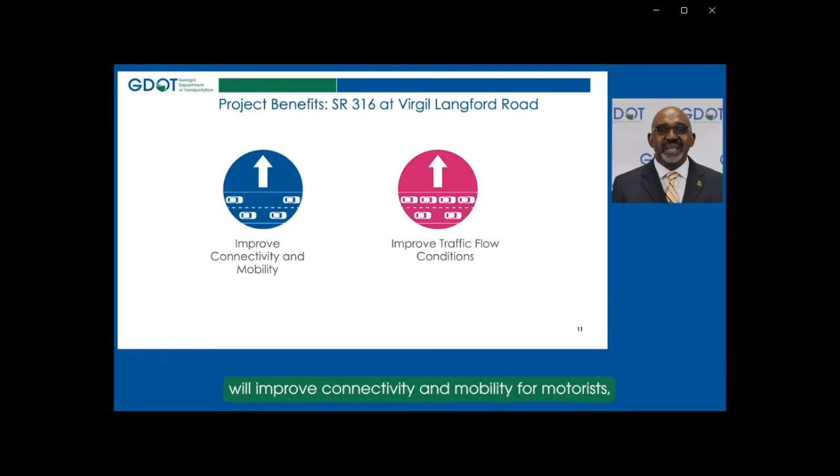Let's take a moment to discuss the benefits of these projects. First, we will look at the Virgil Langford Road grade separation. We anticipate moving forward with this project will improve connectivity and mobility for motorists, and that this project will result in improved traffic conditions.

Continuing with the discussion of project benefits, the State Route 316 at the Oconee Connector project will improve mobility, reduce the potential severity and frequency of crashes, and improve traffic flow, as previously mentioned. The benefits of both projects are in line with the goals to improve State Route 316 as a key transportation facility for this region.

This is the proposed schedule for both projects. We started the environmental process in 2021, and it will continue until 2023. We are currently conducting a virtual public information open house, which includes the virtual event you are participating in today. In 2023, we will select a design build team, and we anticipate construction starting in 2024. We will continue to provide regular updates and communication to stakeholders and the public throughout the duration of the project.

It is important to note that these two projects will be packaged together as a bundle with State Route 316 at Jimmy Daniel Road for procurement, final design, and construction. Project schedule and dates are subject to change.

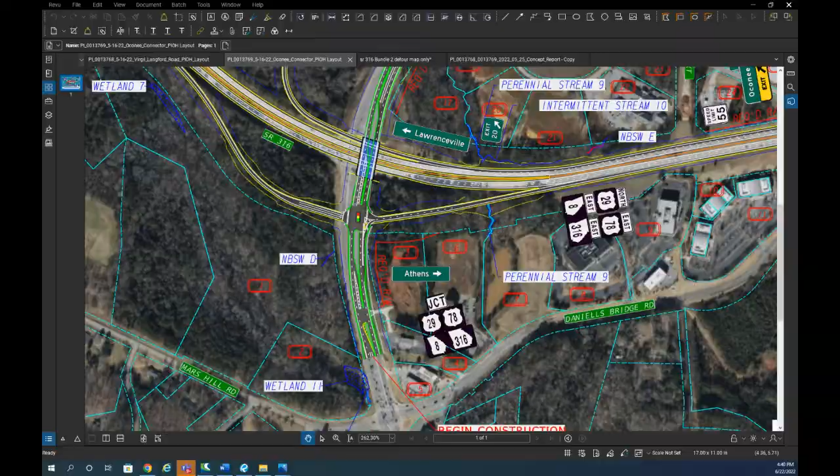And Chris, we may want to leave that up for this next question from Jennifer. Okay. Jennifer's follow-up question is, what was the idea behind making the Virgil Langford overpass separate from the entrance and exit ramps for Oconee Connector? These two roads and intersections appear to overlap.

All right, let's see. Well, I think I understand. So the reason Virgil Langford is separated from 316 and from the ramps of the Oconee Connector is that 316 is going to be a high-speed facility with limited access points of entrance and exit. The traffic volumes on Virgil Langford don't suggest that that's needed. We don't typically add additional access to an interchange ramp, if you will.

In other words, we wouldn't, and I'll switch over to the other layout. So Virgil Langford crosses here. Right there, those are high-speed locations where vehicles are picking up speed to enter or dropping their speed to slow down. Intersections for Virgil Langford there would just not be safe, and that's just not something that we do. The best idea here is to separate Virgil Langford from 316 and create a new connection going from one side of Virgil Langford to the other side over 316. I hope this answers your question.

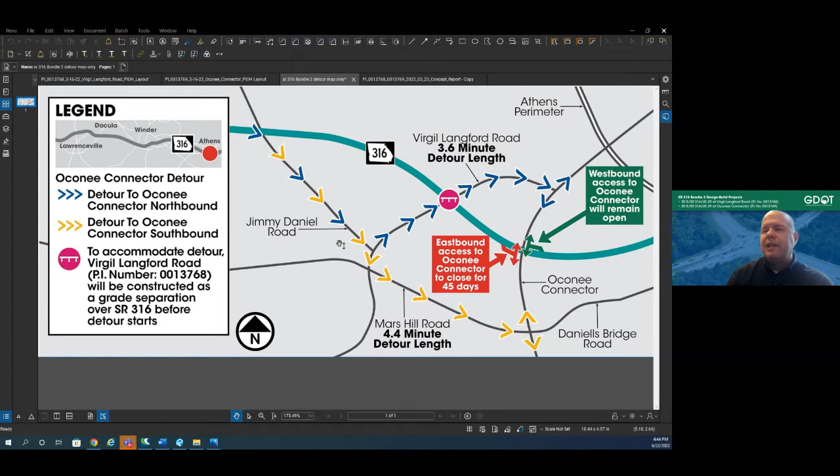One thing to point out is that this absolutely requires the Virgil Langford grade separation project to be complete to the point where they can open up traffic onto Virgil Langford. It's designed to split traffic up northbound and southbound, but it's a 45-day limit he'll have to work within. It's an option he'll have, though we don't know for sure if he's going to implement it. It is his choice. I hope this answers your question.

Thanks again for that clarification, Chris, related to the detour. Looks like we have an additional question from Jennifer and Achor. This seems to be a traffic and signal timing question that Jennifer's curious about. Give me one second. Will the new entrance/exit ramp intersections be synced with existing county-run intersection lights at Virgil Langford and Mars Hill?

Thank you, Carl, for that traffic question. We have a subject matter expert on traffic on our panel with us today. His name is Paul. Paul, can you help us with this question? Yes, Achor, certainly can, and thanks for the question.

I believe the overall goal would be to coordinate all of the traffic signals. This is now a statewide program that GDOT has, they call it SIGOPS, and it's not just state intersections. It also works very closely with local agencies to bring their owned and operated intersections into the fold, so that traffic signals, regardless of who owns and operates and maintains them in small clusters such as this, all work together.

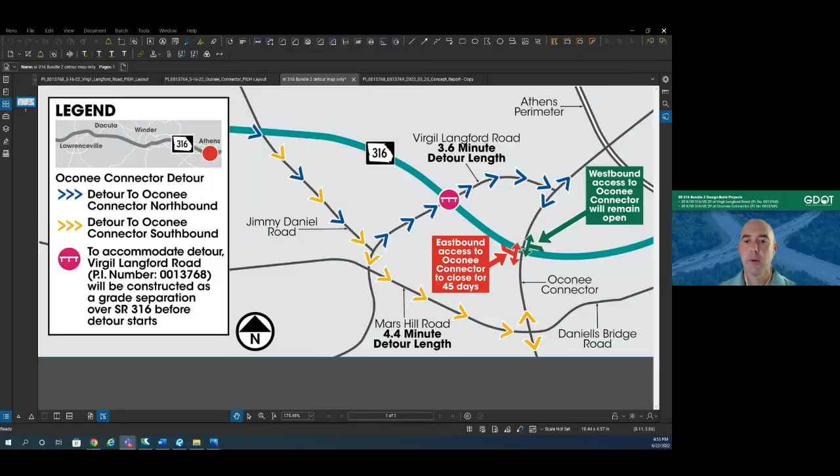All right, so we have another question that came in from Jennifer. Thank you for all the great info today and being tuned in. How much reduction will there be with the exit ramp from Oconee Connector onto eastbound 316 towards Loop 10, compared to the current intersection at Loop 10?

Thank you, Kyle. So this sounds like a traffic question. Paul, our subject matter expert, can you please help us address this? Yes, I can. While the traffic forecast involves a lot of very detailed calculations and statistical analysis, at a high level, it does not appear that there will be a significant reduction in the turning movement traffic volume expected from 316 at the Oconee Connector towards Loop 10.

Some traffic from Virgil Langford Road attempting to enter State Route 316, both eastbound or westbound, could be rerouted. Having that additional interchange will pull some traffic. It's difficult to project in some instances. That's the fun part of traffic forecasting, trying to figure out what works best, what works optimally for the individual driver. We often have to use good engineering judgment, look at a lot of statistics and turning percentages of what's out there today, and figure out what might be the best paths. We use those projections, and they are just projections, for designing the layout of this project. So we think there will be some reduction, it may not be that significant. Thanks for the question.

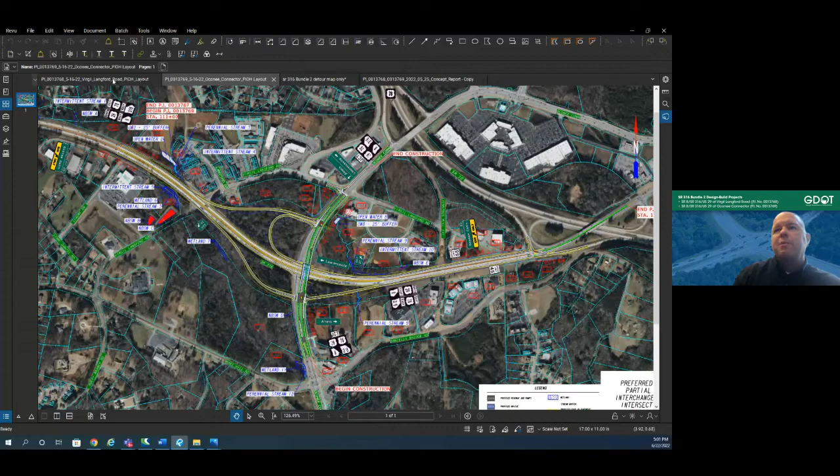So I hope that explains what we're doing for Oconee Connector. And now I'm going to jump to the Virgil Langford. What you see is we've turned off the Oconee Connector, and you just see the Virgil Langford portion of the project. I think most people know, if you're familiar with the area, Virgil Langford access is a right in, right out, depending on which side you're on.

So you can't actually physically drive all the way across. So that access, when construction starts, will be immediately removed.

And so the contractor will build the bridge, build the grade separation, and open it up to where now both ends of Virgil Langford Road are connected.

I know a lot of people would be concerned about access to the multiple medical facilities here in the northern part on Virgil Langford. During construction, access to all those will be maintained at all times. If you have doctor's appointments or anything like that, you will not lose that access. The difference is you might have to take a slightly different route than before, and until this road is open, you'll have to access it through the Oconee connector and go northbound. But rest assured, keeping access to those medical facilities is a high priority for us, and that's one of the reasons that explains the design of Virgil Langford.

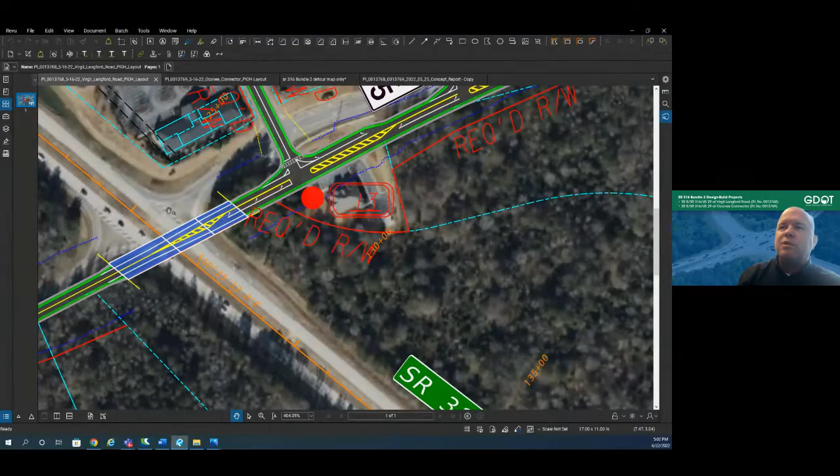You can see we've shifted the alignment over a little bit towards the east. Let me zoom in tight here. So here's the existing portion of Virgil Langford, and now we're over to the east. We did that because of the large amount of medical office development here. If you think about a grade separation, that road is now elevated 25 or so feet above 316, so that's a lot of impacts if I were to build it right on top of the existing alignment. I'd have a large impact to this building and impacts to this building as well if we kept it on alignment. We've shifted it over to minimize the impacts to these businesses.

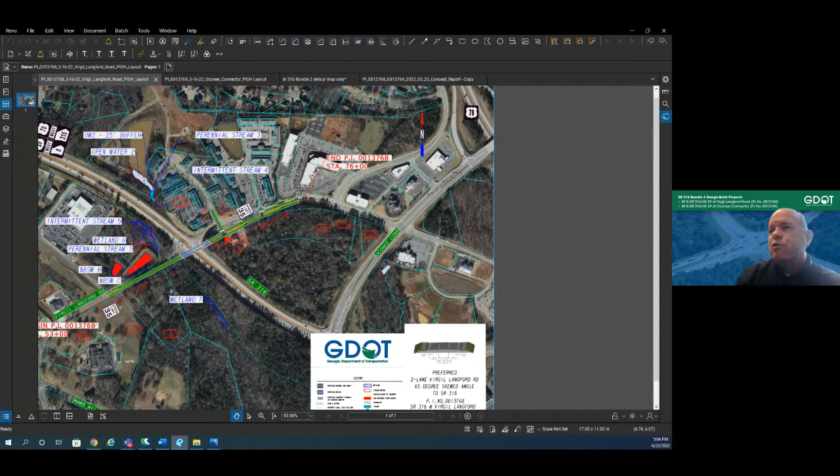Unfortunately, it does result in a significant impact, resulting in a displacement to the business located on the right side. But there's good news, and I'm pretty happy with it: it provides a lot more connectivity and mobility across Virgil Langford. Also keep in mind, we are extending the sidewalks along Virgil Langford as well. There's sidewalks on the north side, and those sidewalks will be constructed across the bridge and then tie back in on the south end where the project ends. So I hope this is a good synopsis of what's going on.

If you do have any other questions, please feel free to ask. I'd be happy to explain. Thank you.

Thanks for that great breakdown, Chris. I think you can see, based on his comments and knowledge of what's happening, there was a lot of care and time that went into the development of what you see today to, like Chris said, increase safety and mobility for Virgil Langford, the Oconee connector, and also the main highway of 316.

While you were running through that, Chris, we had another question come in from Jeff. This is another detour-related question, a little bit more in the weeds, about that 45-day limit. Can you further define the 45-day limit for detouring traffic? Is this 45 calendar days or 45 business days, Monday through Friday? Also, are they allotted bad weather days that don't count against the 45-day allotment? So how would we like to answer that one, Ashore?

Thank you, Kyle. Chris, do you want to take a stab at this one again? Sure, I could do that.

So we've already gone over the route. Let me get into a little more detail about why we're giving him 45 days and why we feel that's plenty of time to finish what he needs to finish. So what we've talked about is this eastbound to southbound, or northbound Oconee, eastbound 316, excuse me, to Oconee connector being cut off. As part of the project, the contractor has to build this ramp here. Keep in mind, during the course of construction, Oconee connector has 2 lanes of traffic in each direction, and that will be maintained at all times. If you look and see, the new alignment for Oconee connector is shifted to the east, much like Virgil Langford. So that does create a bit of a problem with finishing this ramp, if you visualize the fact that we're going up and over 316.

Thanks a lot for that, Achor. Hopefully we got that timing angle covered after Jeff's question related to the detour. We're a little over an hour in now, everybody, so for those who joined us a little late, I'm going to ask the producers to pull up a project visualization video. It's a projected 3D rendering that gives you an idea of what it will look like when things are complete for these two projects. Let's cue that up right now.

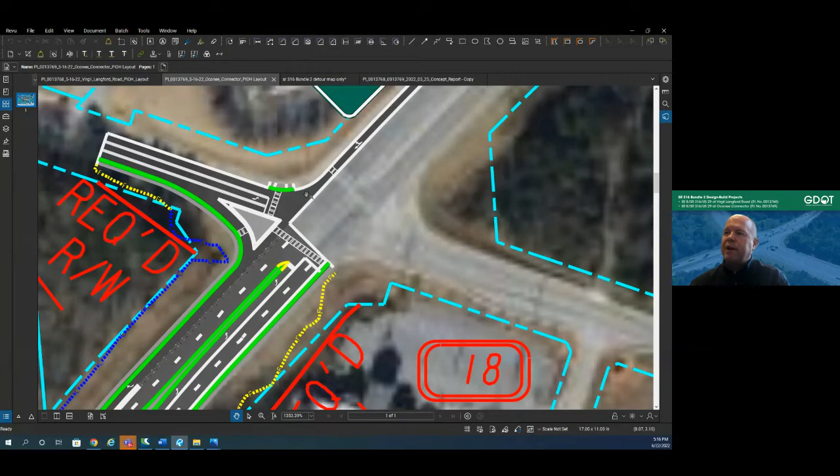The existing one at Virgil Langford will remain, although it will be slightly modified because we are changing this lane from a right turn only to a through-right that carries down to the ramp. So that will get a slight modification. And then the signal here at Mars Hill and Oconee connector will not change at all. That will remain as is.

Now, like Paul did say, there will be an effort to sync these, coordinate the timing as best as possible for these new signals and the existing ones.

Now, the last signal we're talking about is this one, and it's getting changed significantly. Like I said, we're implementing a continuous green T where eastbound traffic remains on the green light at all times, and the left turning traffic from the SR10 loop going eastbound on 316 will merge into the median, separated from the through traffic. They'll be allowed to accelerate, and as they go across the existing bridge, they'll have enough length to get up to speed and merge over.

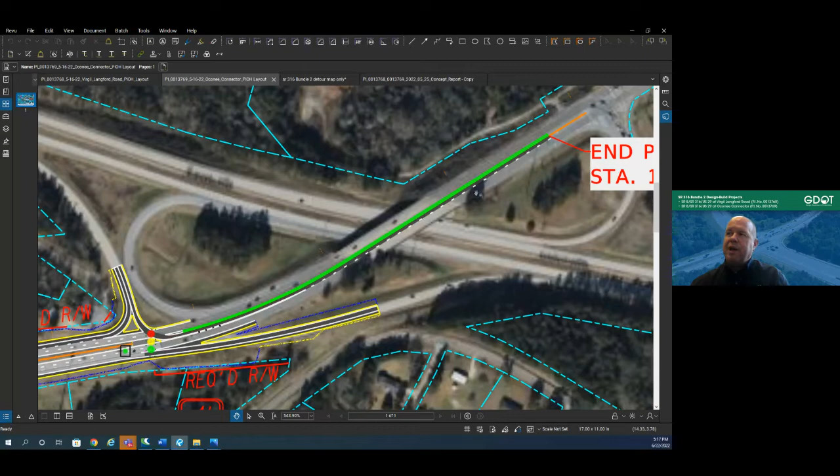Now, as we say, the project ends here, so this light at the other side of the existing interchange will remain as is as well. So as far as signals go, there's nothing on the Virgil Langford portion of the project for signals, but I think that covers all the existing and all the proposed within this footprint.

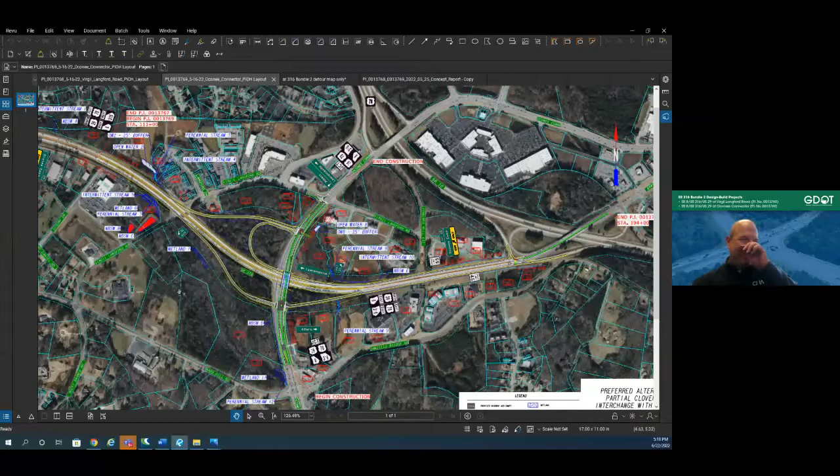Sorry to hammer you again, Chris, but I think we need to leave this up. We'll just keep the camera on you, I'm going to feed you a few more. This is a clarification from Jennifer as it relates to the connector coming on 316 towards the loop.

To rephrase my exit ramp question: the exit off Oconee connector onto 316 towards the loop appears to be much shorter for merging traffic than the current Oconee connector intersection. Is this correct? Well, let me zoom in tighter.

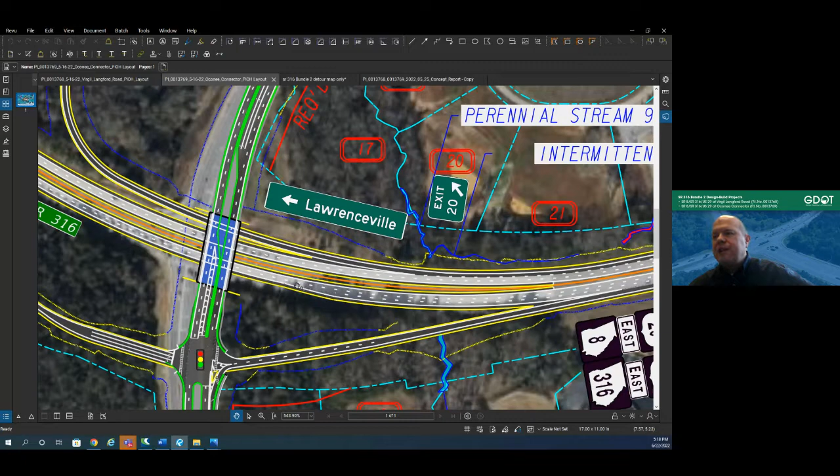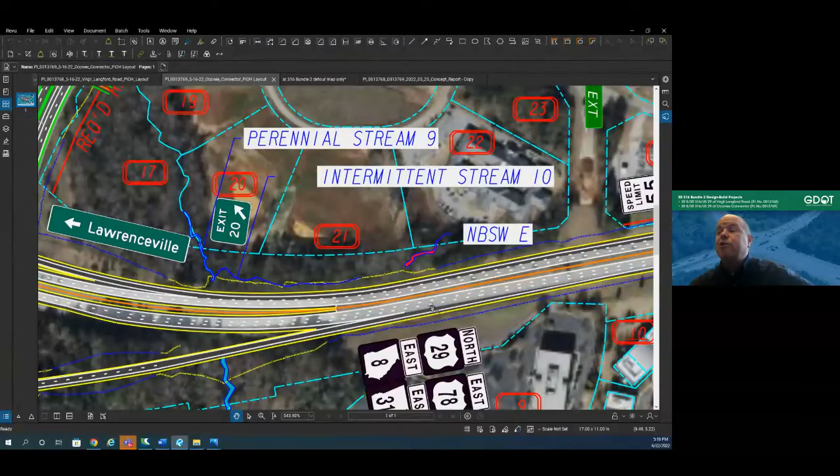Right now, if you're coming northbound on Oconee and you want to take the loop, there's a right turn that's the start of that exit lane that takes you to the SR10 loop ramp. That one's going to be removed, obviously, because the intersection's gone, but you'll see a slight taper here. So this outside lane here is the lane you'll need to get into to merge to the slightly reconstructed ramp to SR10 loop.

So what will happen is traffic—let me make sure I get this right in my head—eastbound traffic on this ramp coming down will have to essentially weave. So the two traffics, one on 316 and one on the ramp, depending on which way they want to go, will have to weave between each other to get into the through lane or to get to the ramp. That was kind of a concern for us, and that's what necessitated the need for the continuous green T, to give us enough length.

So we have roughly 2,000 feet between where this lane merges, or where the ramp merges into the far right lane for 316, to where they separate to go to the ramp to SR10 loop. So that allows us a significant amount of distance, and keep in mind, the speed is going to be 45 miles an hour.

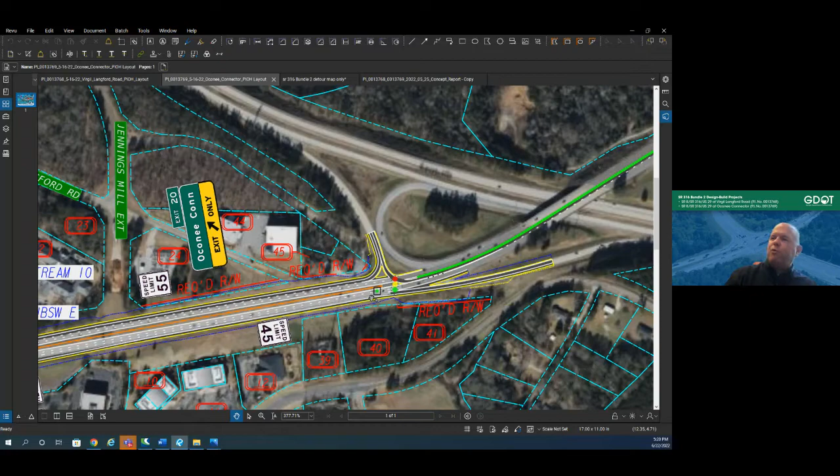So at this point everything's kind of slowed down because this is at the end of the high speed section of 316. This is where everything's slowing down, so cars aren't traveling as fast, and they have enough time to weave and merge as they need to get where they're going. I hope this answers your question.

If I can interject something, Chris. Oh, sure, go ahead, Paul. One of the key fundamental differences, when you consider the length of the on-ramp itself, is that it's the same or just ever so slightly longer.

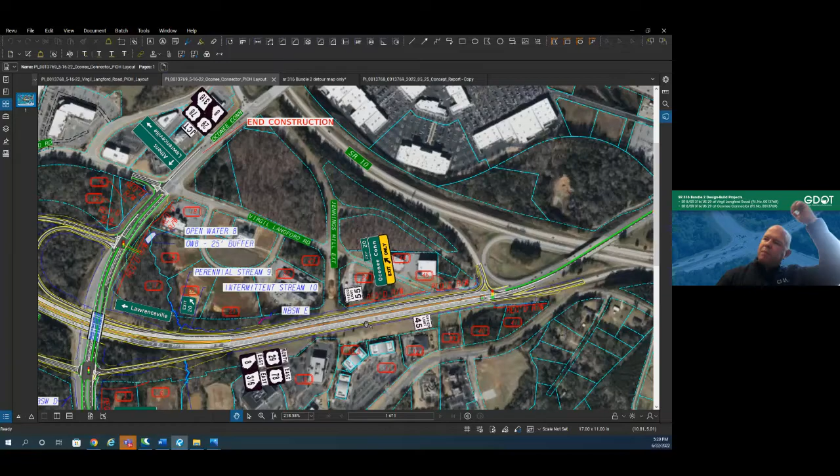The primary difference is going to be where traffic currently turns in at the right-in, right-out — you're at a stop or nearly at a stop. At the end of this entrance ramp, you'll be at a much better speed to blend with traffic, weave over if necessary, so the safety aspect is greatly enhanced. Even considering the length of the on-ramp, the total length between the existing intersection and the exit ramp today is fairly close to the same.

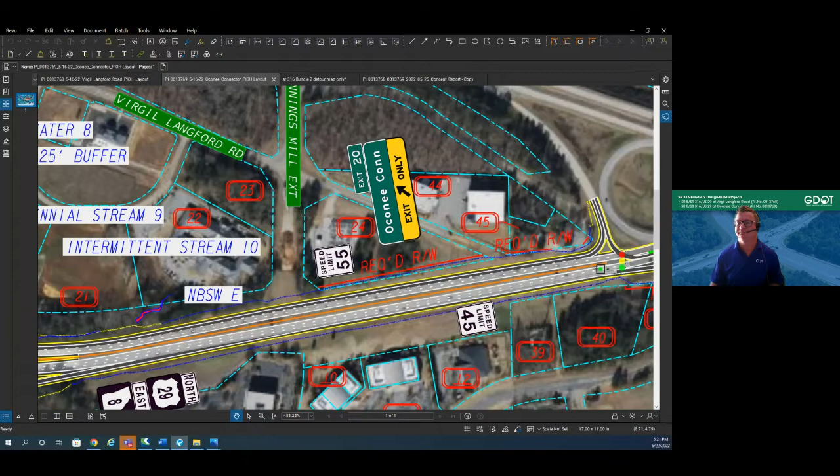Awesome, Chris, and I got one more for you. So we're going to throw you back up on the screen — thank you for being a trooper, appreciate all your info. Hey, that's my job, baby. Yeah, let's keep sharing that concept.

Will there be a continuous third lane from the Jimmy Daniel intersection to the Oconee connector? Yeah, I think I understand the question. A continuous third lane — there will be, from ramp to ramp.

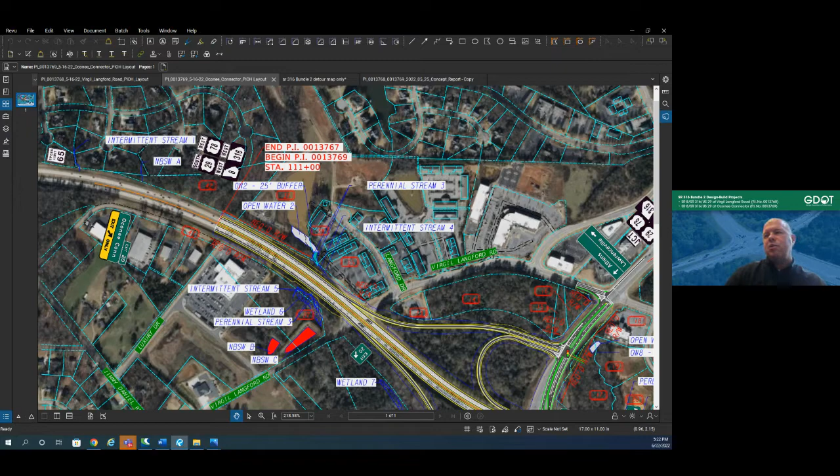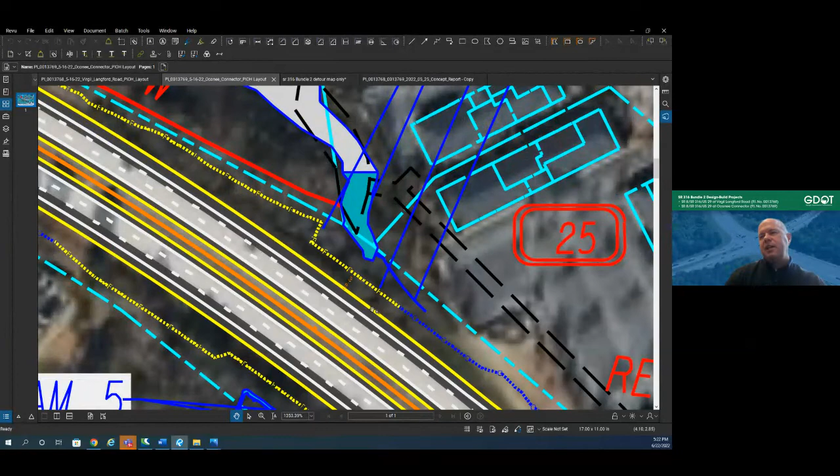I wish we had the Jimmy Daniels interchange shown. The Jimmy Daniels interchange ramp ends roughly just outside of our picture, and that ramp merges directly into an auxiliary lane — it's the same for eastbound and westbound. So I'm going to zoom in on the westbound ramp. We're showing three separate lanes here. This outside lane comes right out of our proposed ramp for Oconee connector westbound. So this third lane starts here and carries all the way over to the Jimmy Daniels westbound exit ramp, and that's where it stops. It just goes into each ramp for each direction.

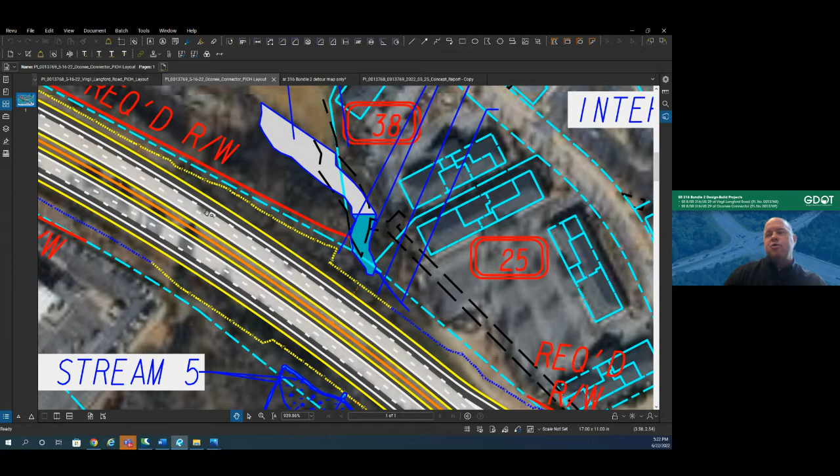So it's basically a third lane from interchange to interchange, ramp to ramp, if that makes sense. The reason for that is they're relatively close together, and having that third lane makes it a lot easier for traffic to merge in and merge out as necessary. So I hope that answers your question.

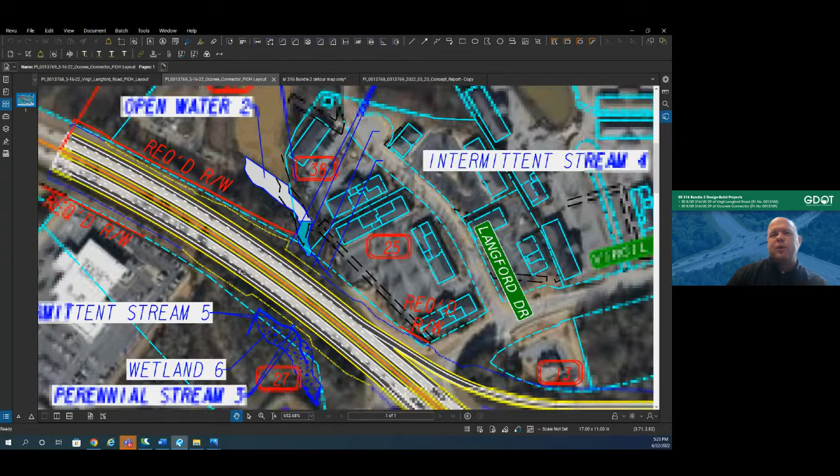Thanks, Chris, we're going to give you a break for a little bit. So another question from Jennifer Achor — I think I may have a general answer to this, please fill in. Is there any way to see all three construction sites, Jimmy Daniel, Virgil Langford, Oconee connector, overlapped onto each other on one map? So I think she's asking for a big overall concept look with all three of these.

How do we want to clarify that, Achor? Yeah, we can make that available, but we don't have it available right now at this meeting to show you. It's something we can make available at a future date. Hope that helps answer the question. Appreciate that, Achor, and Jennifer, thank you for your interest today — it's been a big help having you put the questions in during the Q&A.

So another one here related to speed limit: would the speed limit change starting at Jimmy Daniel into the Loop 10 interchange to mediate traffic flow? Thank you, Cal, for that question. Let's have a traffic subject matter expert help us with that question. Paul.

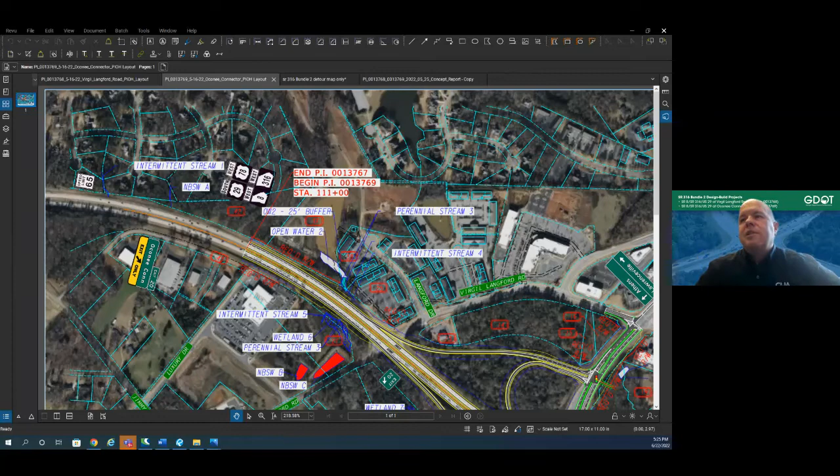So the question, if I'm correct, is what will happen to the posted speed limits between the projects and then all the way carrying out to the loop. Right now SR 316 is 65 miles an hour through the Oconee connector, and then once you get east of that, it transitions to 45.

What the project will do is, because it's transforming into something that moves traffic a lot better and carries more traffic, it'll be 65 miles an hour through the Jimmy Daniels interchange on 316.

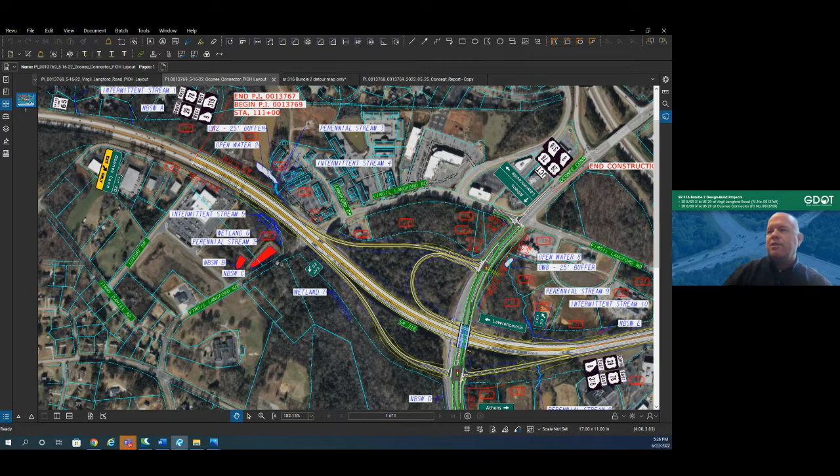And then as you approach the Oconee Connector interchange, we start to slow down because everything's kind of going back to existing once you get over to the SR10 loop. So 65 miles an hour to the west.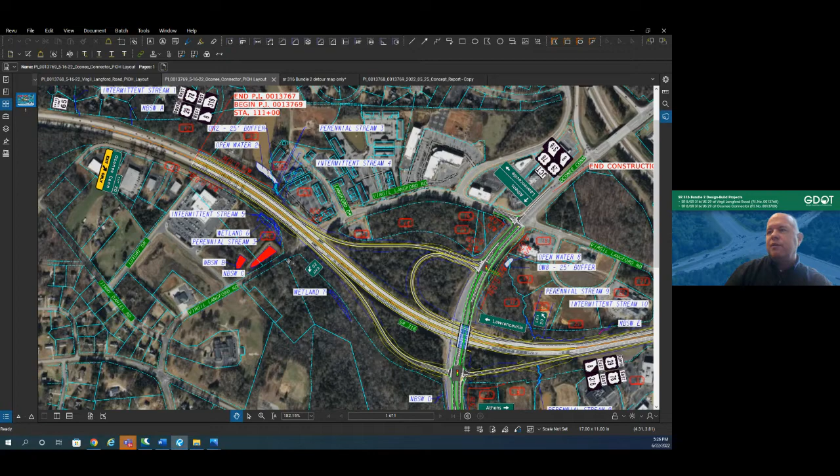And then as you approach roughly around the proposed bridge at Virgil Langford, it's going to transition to 55. And then at that point you'll go underneath the bridge, and then the median, actually I'm going to zoom in tight here so the median changes. So this side, west of everything, it's a grass median, and it's a little bit larger, so we can travel at higher speeds.

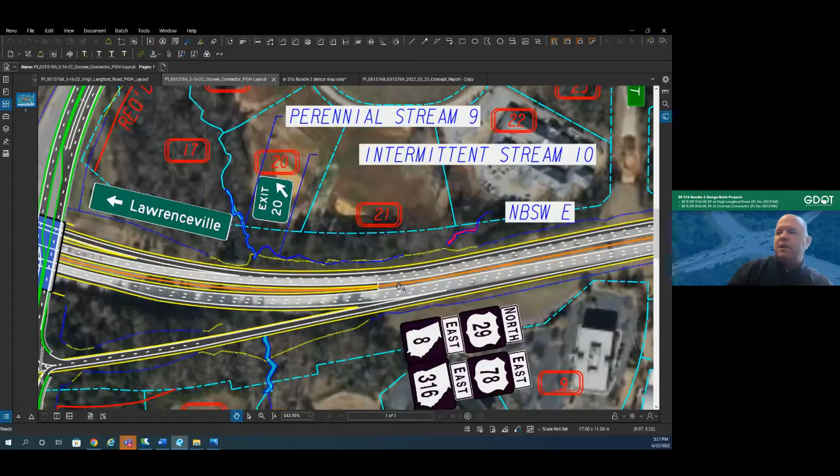But because the median transitions to a raised median, that requires a slower speed. So once we get roughly in the same spot as it is now, we'll be back to 45 miles an hour, just like it is right now. So 65 to 55, and then 55 to 45 on 316.

I hope this answers your question. Thanks for that clarification, Chris.

So, Achor, we have a question about construction duration coming in here as it relates to Virgil Langford. So how long will Virgil across 316 take to construct, Achor? Thank you, Kyle. Chris, can you help us with that answer? Yeah, I absolutely can, and I don't necessarily need the layout for that, but...

So like we talked about, the detour is going to be implemented. We got to have the Virgil Langford Bridge constructed, and the road constructed and open. So the Virgil Langford portion will roughly take 12 to 18 months using conventional bridge construction methods, and that includes the roadway as well to elevate it up and over 316. So 12 to 18 months should be plenty of time for them to build it and get it open.

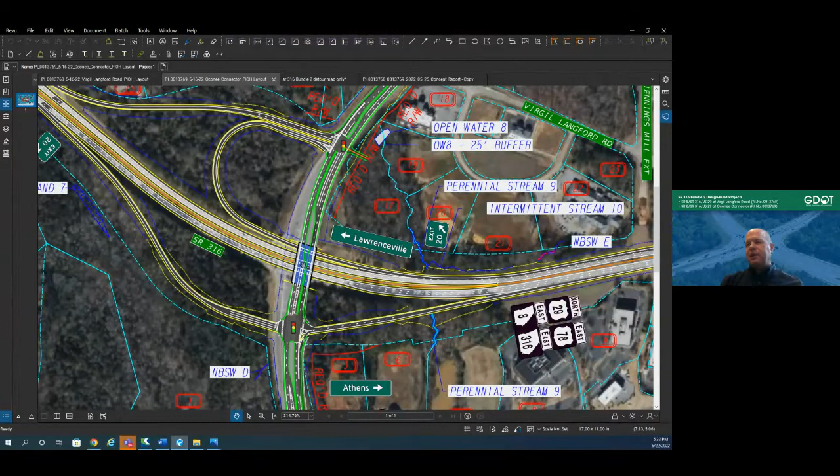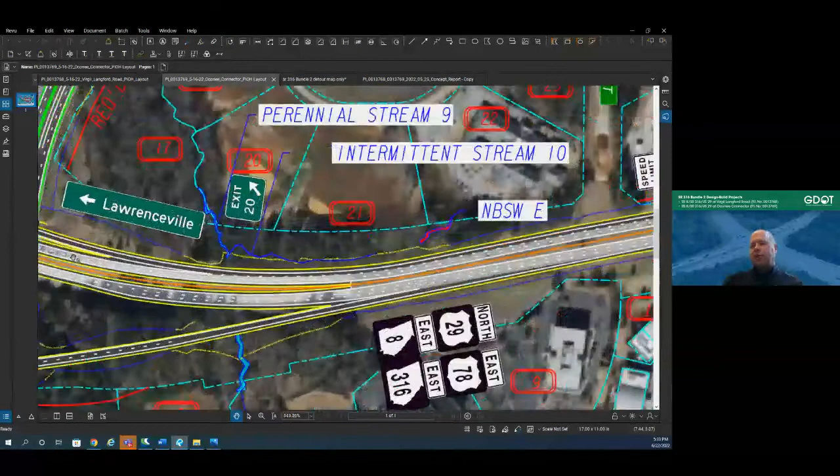Yeah, I think I understand the question, and I'm going to go back to the layout because it's a great tool. So the question was, if traffic coming on Oconee Connector wishing to go eastbound on 316, all the way up to the Loop, there are 3 lanes, and that is correct.

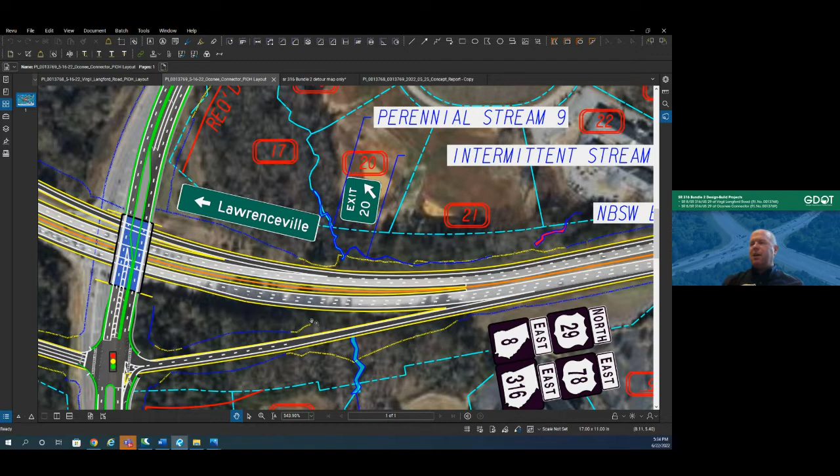Like we talked about before, that right turn movement coming from Oconee northbound to 316 eastbound does start a 3rd lane that goes all the way to the Loop ramp, the SR10 loop ramp exit, or I guess I'd call it the southbound exit. So what's happening is because we're eliminating the at-grade intersection, we're creating this ramp. We will still have 3 lanes extending all the way to the Loop intersection.

So I'm going to zoom in a little bit tighter here. And like we talked about, I'm going to relate it to how I've traveled on this road before, going out to Athens. Usually we access the Loop, and that's still going to be done with a 3rd lane. You can see right here, there's 2 lanes, and it tapers out to add a 3rd lane. So this 3rd lane will be the lane that takes you to that SR10 Loop ramp.

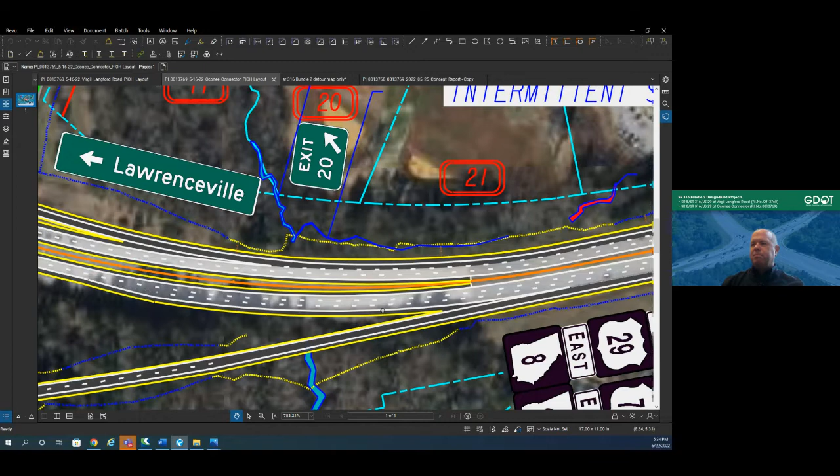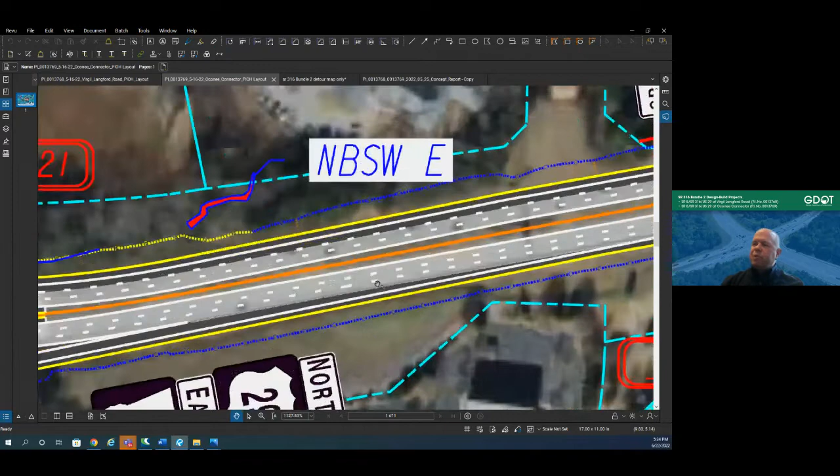So I'm just going to pan across a little bit. Now here's the Oconee Connector ramp. You will drive down, you will merge into that third lane. Let me zoom in a little tighter. So this traffic will merge into that lane as well.

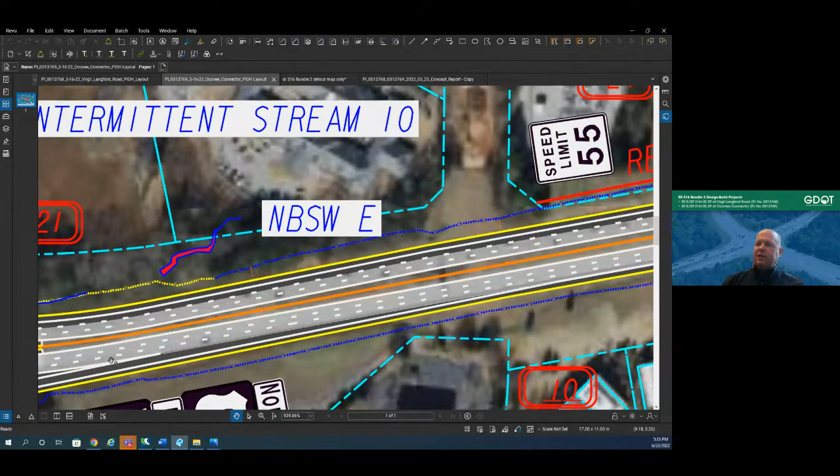So what will have to happen is if the ramp traffic wants to take 316 all the way into town, they will need to weave or merge. Once they've merged into that far third right lane, they will need to weave over into the two inside lanes to go straight. Whereas the traffic that's already entered into the lane to access the Loop ramp, they're just going to stay where they're at. They have no reason to get over to access that ramp.

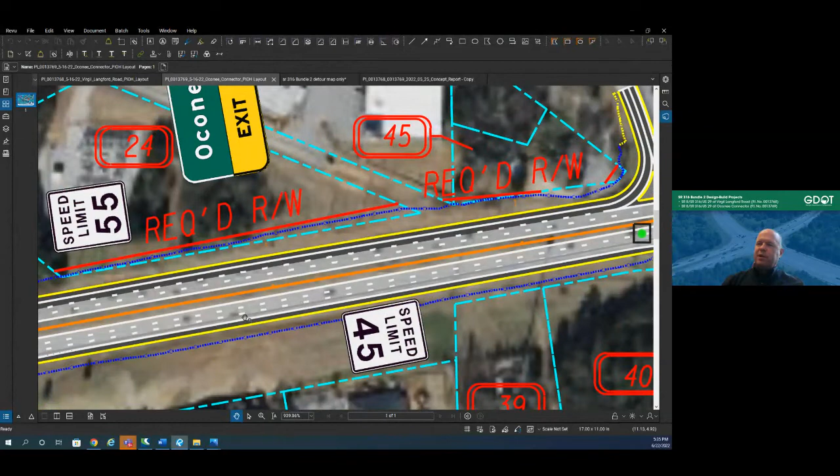So if you can see on the screen, this lane flows right into that ramp, and then it'll continue on much like it's right now. The only difference now is we're just adding this ramp from Oconee Connector. So yeah, you'll still have 3 lanes. It's just a little bit different configuration than what was before. I hope this answers your question.

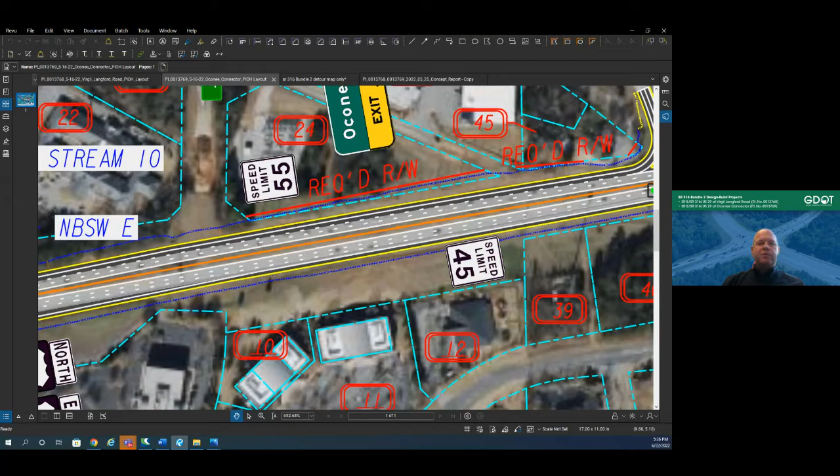Thank you, Chris, for clarifying how everything interacts with 316, the Loop, and Oconee Connector versus what's out there currently. Just wanted to read this one off, Chor and team. This wasn't really a question, it was a comment, and it was a positive one. It said, please thank all the staff for taking the time to do these meetings. I hope we can have a status meeting when construction starts.

So the best way, once we get down the line to selecting that developer, and like we talked about, late 2023 and things getting underway in 2024 on this bundle, is to make sure you stay tuned into that website. There's a project hotline. Make sure you follow us on social media accounts. There's dedicated feeds, not only statewide, but also GDOT Northeast on Facebook and Twitter, as well as your local media outlets will get our updates to make sure y'all know exactly what's happening in this Oconee County area.

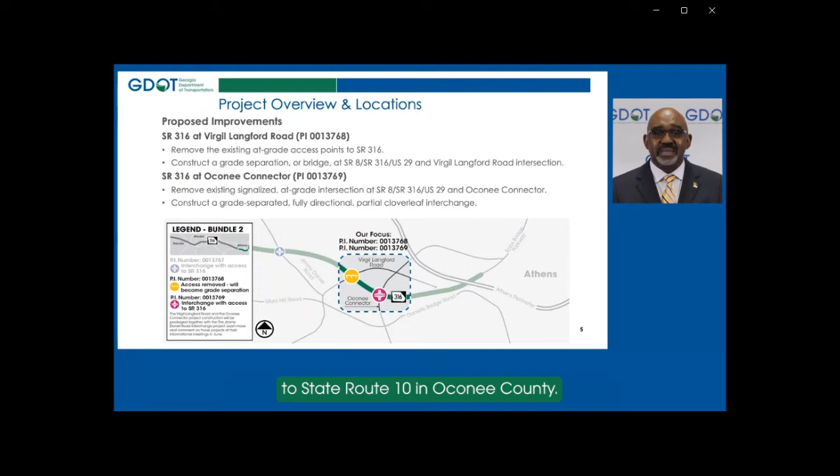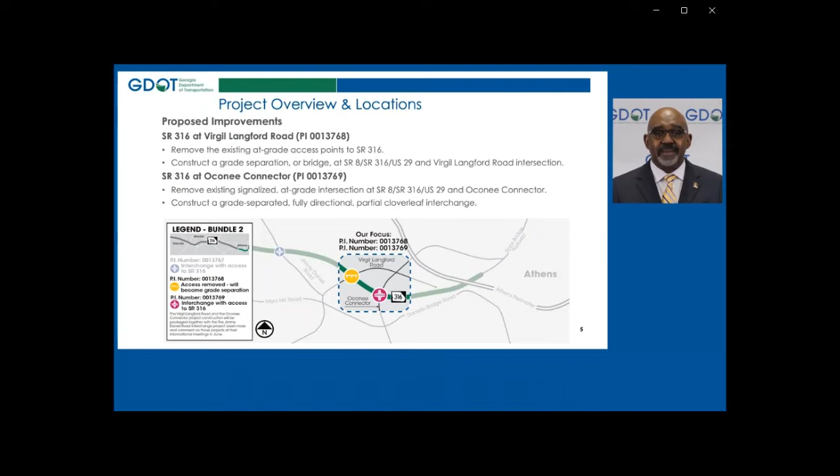Now let's get started. State Route 316 is a primary east-west corridor in northeast Georgia that connects Greater Atlanta and the Athens metropolitan area. The two proposed Georgia DOT improvement projects we are going to discuss today are part of a series of projects along State Route 316 from State Route 20 at Gwinnett County to State Route 10 in Oconee County. These projects will upgrade sections of State Route 316 to more of a free-flow facility, which may provide a safer travel experience and address some of the challenges along this corridor, particularly high crash rates and congestion. Our focus today will be at State Route 316 at Virgil Langford Road and State Route 316 at Oconee Connector.

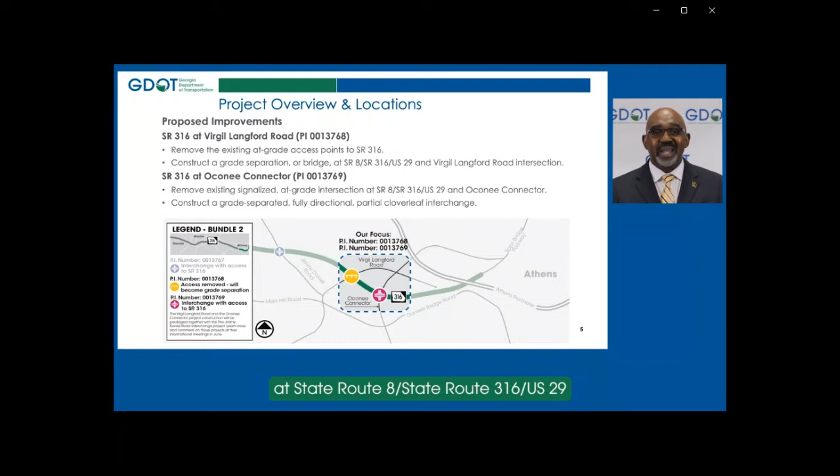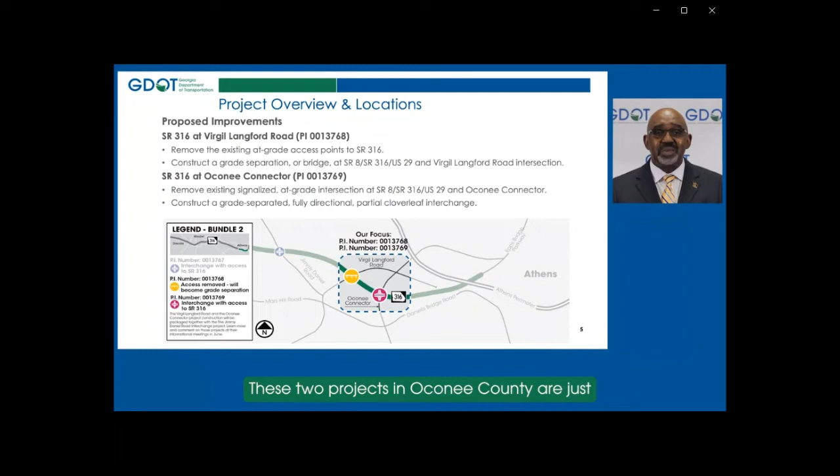On State Route 316 at Virgil Langford Road, we propose to remove the existing at-grade access and construct a grade separation or bridge at State Route 8, State Route 316, US 29, and Virgil Langford Road intersection. On State Route 316 at Oconee Connector, we propose to remove the existing signalized at-grade intersection at State Route 8, State Route 316, US 29, and Oconee Connector, and construct a grade-separated, fully directional, partial cloverleaf interchange. These two projects in Oconee County are just west of Athens. The overall project length is 1.5 miles.

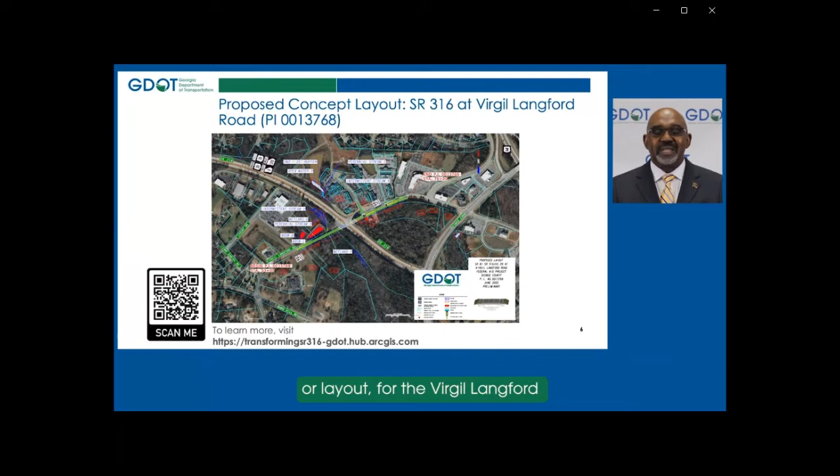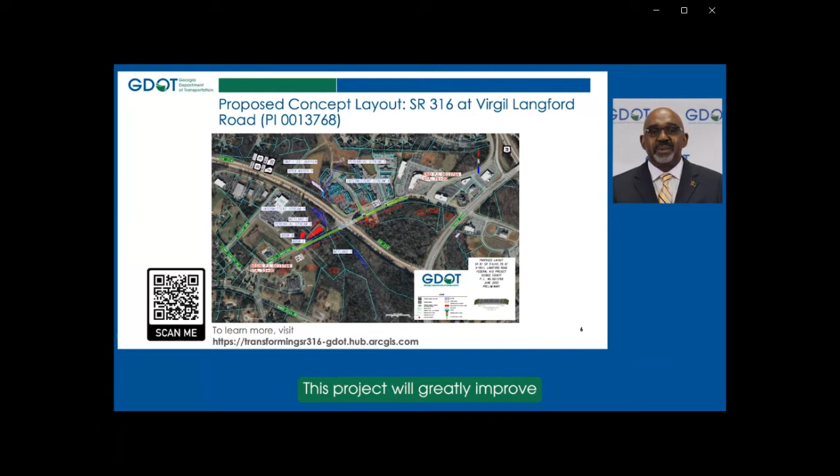This slide includes the proposed conceptual design or layout for the Virgil Langford Road over State Route 316. This is a preliminary layout and subject to change. We call this layout the preferred alternative as it best balances the needs of the project corridor with potential impacts such as property and environmental. I won't go into the specifics of everything illustrated here. However, the layout shows existing features as well as the proposed shifted alignment and the new bridge over State Route 316. This project will greatly improve connectivity to the medical businesses located at the northern side of Virgil Langford Road.

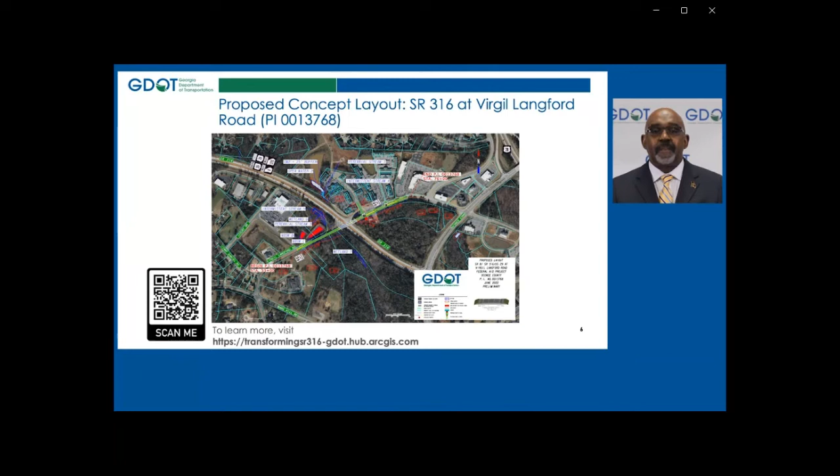We encourage you to view the alternative on the project website located at the virtual meeting room. A link and QR code are included on this slide. Within the virtual meeting room, you will find more information about the proposed layout, typical sections, and the visualization video, which offers an aerial perspective of the project. You may also use the question and answer session after the presentation to ask questions about the proposed concept design.

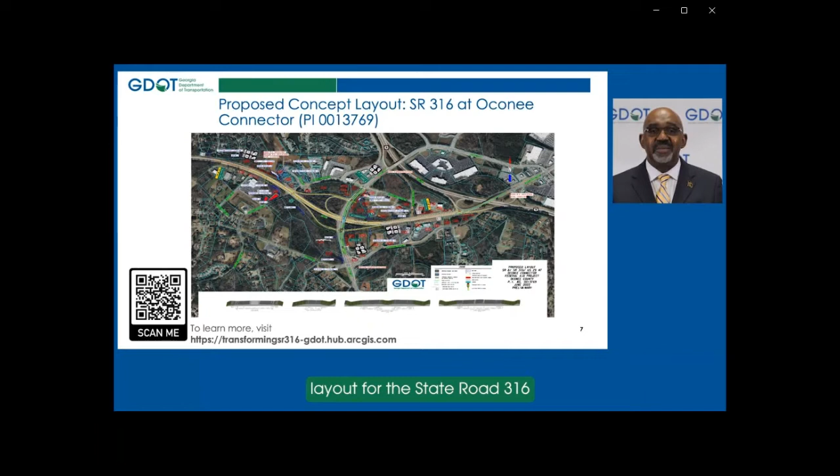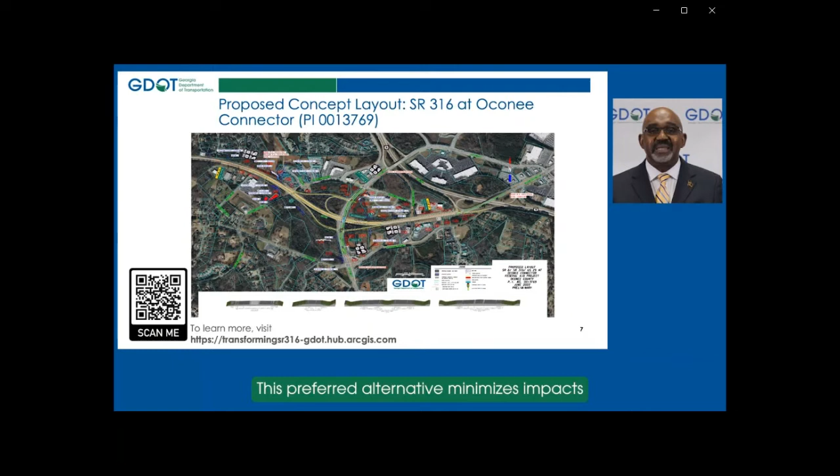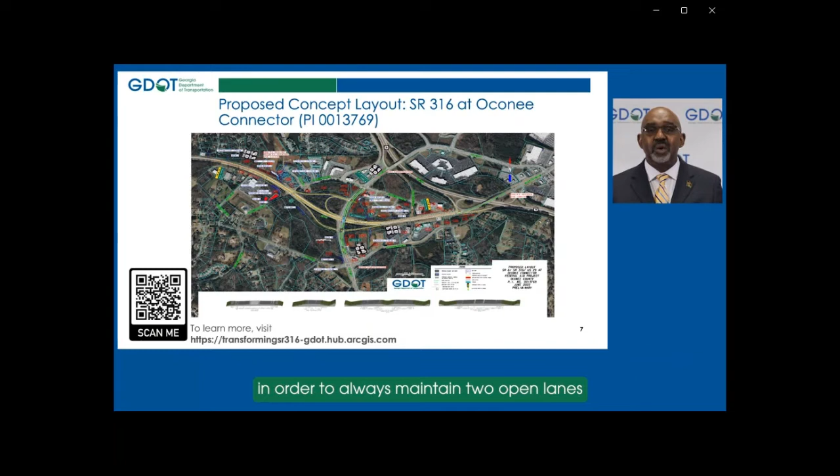Now, this slide shows the proposed concept layout for the State Route 316 at Oconee Connector interchange. Like I mentioned in the previous slide, this layout is preliminary and subject to change. This preferred alternative minimizes impacts to property and environmental resources. Construction for this project will be staged in order to always maintain two open lanes in each direction on the Oconee Connector. Again, this concept display can be found in the virtual meeting room on the project website. I encourage you to use the question and answer session after the presentation as an opportunity to ask any question about the design to our subject matter experts.

For the State Route 316 at Oconee Connector project, there is a potential need for a detour during construction. This detour will affect the eastbound State Route 316 traffic wanting to access Oconee Connector.

If the design-build partner chooses to implement the detour, they will have up to 45 days to complete the work needed during the set detour duration.

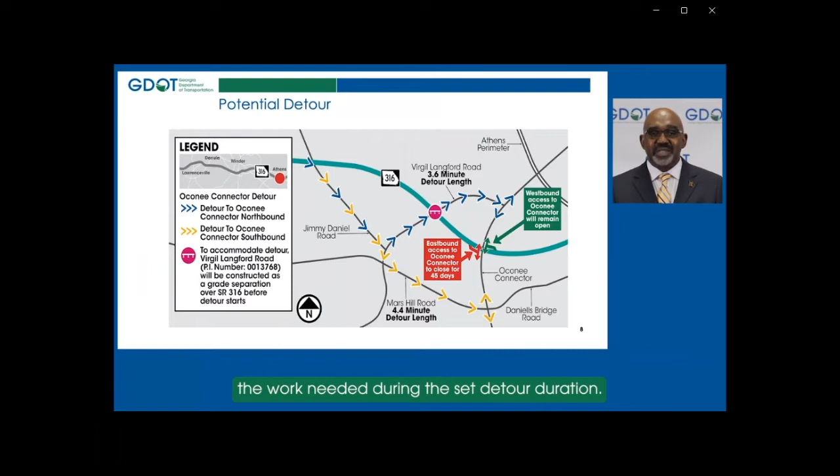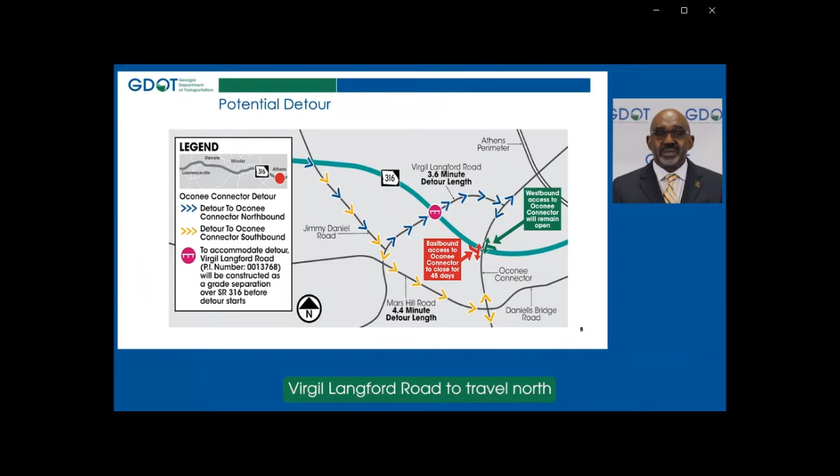According to the map, eastbound 316 traffic will need to exit at Jimmy Daniel Road and head south. Depending on the direction needed to travel on Oconee Connector, motorists will take either Virgil Langford Road to travel north or travel on Mars Hill Road to go south.

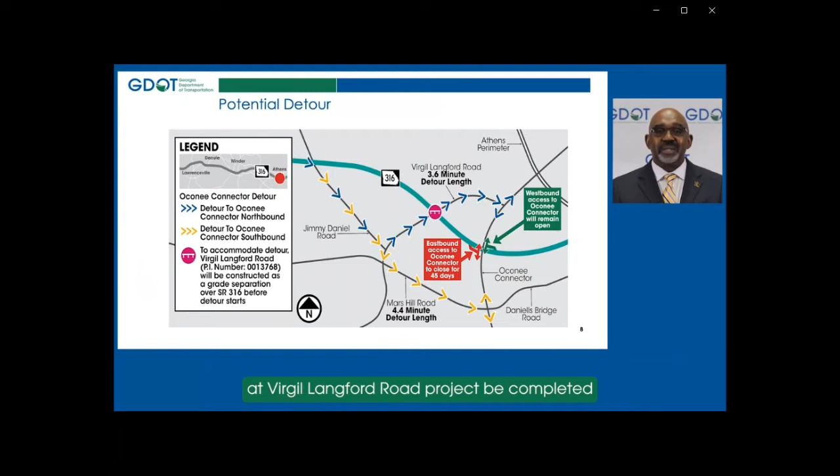As you can see, this potential detour will require that the State Route 316 at Virgil Langford Road project be completed prior to the implementation of this detour route.

Now, having shared some information on the proposed improvement projects, let's focus on the existing conditions within the project limits of Virgil Langford Road. We provided a few statistics to help frame these primary challenges: increased traffic, increased incidents, and lack of connectivity. Virgil Langford serves 5,400 vehicles per day, with truck traffic representing 2% of the total volume.

From 2016 to 2020, there were a total of 191 crashes at the vicinity of the project intersection. By removing the existing intersection, the expectation is that crash rates will be reduced.

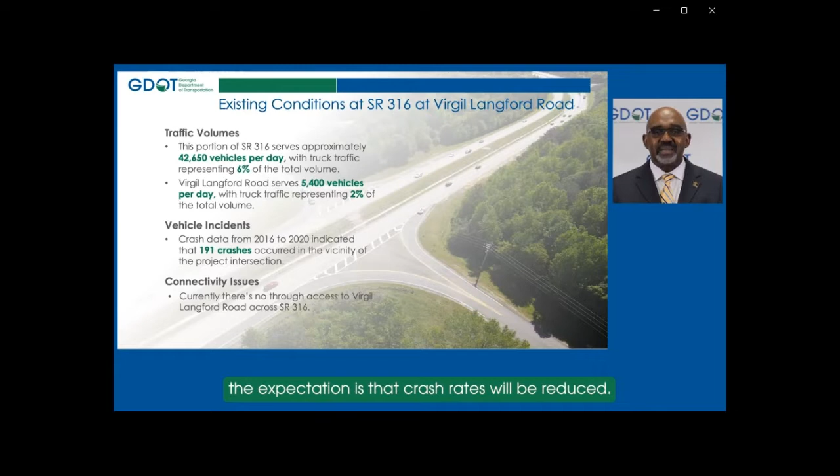Currently, Virgil Langford Road is two separate roads divided by State Route 316. This creates a connectivity issue to important destinations and impacts response times for Oconee County first responders.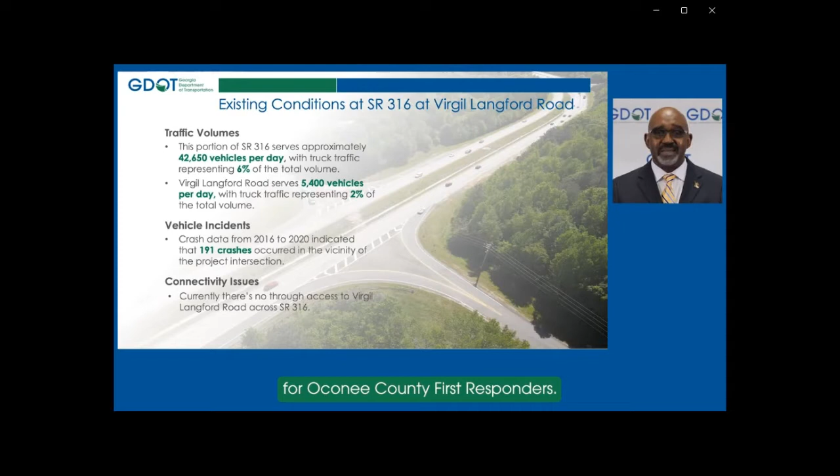If we choose not to build this project, the two separate existing intersections for Virgil Langford Road will continue to diminish connectivity and mobility.

For the second of the two projects, we'll examine the existing conditions and the challenges they create, focusing on traffic volumes, incidents, and increased congestion. The Oconee Connector serves 26,500 vehicles daily, with 6% truck traffic.

From 2016 to 2020, there were 269 crashes occurring in the vicinity of the existing intersection, with speed often a contributing factor. Finally, congestion is a challenge.

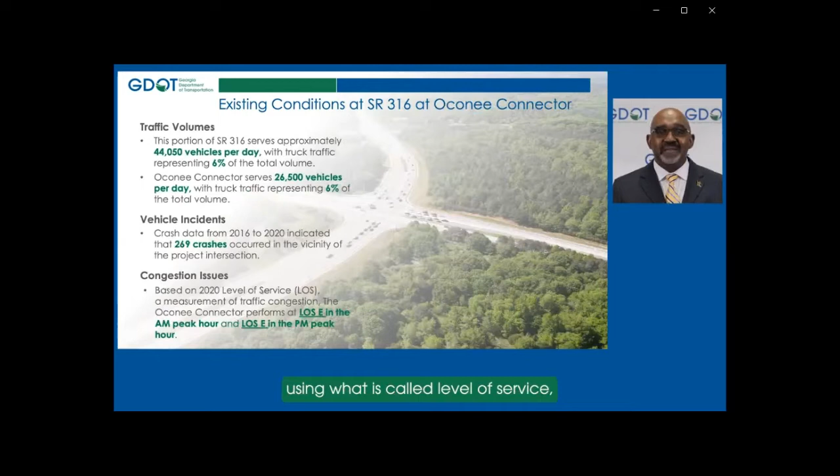We measure traffic congestion using what is called level of service, or LOS. Level of service describes the operational conditions of a roadway based on factors such as speed, travel time, maneuverability, delay, and safety. Level of service is designated with a letter from A to F.

Level of service A represents the best operational condition, and F represents the worst. The existing level of service for SR 316 at Oconee Connector intersection is an E in both the AM and PM peak travel times. Level of service E indicates traffic is operating at near capacity with little or no room for drivers to maneuver between lanes.

Traffic volumes are expected to continue to increase along the routes. If we do not improve this intersection, you will have what we call the no-build condition, and it's expected to worsen in future years.

By moving forward with this project, we anticipate the level of service B in both the AM and PM peak travel times at the open to traffic here at the new intersections.

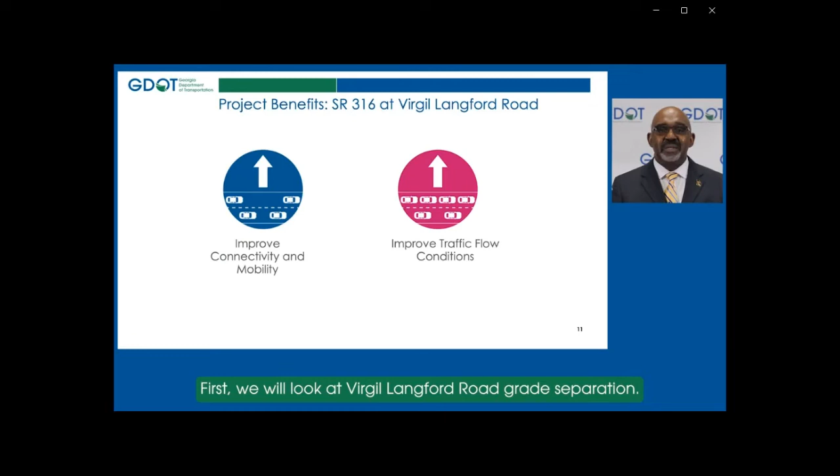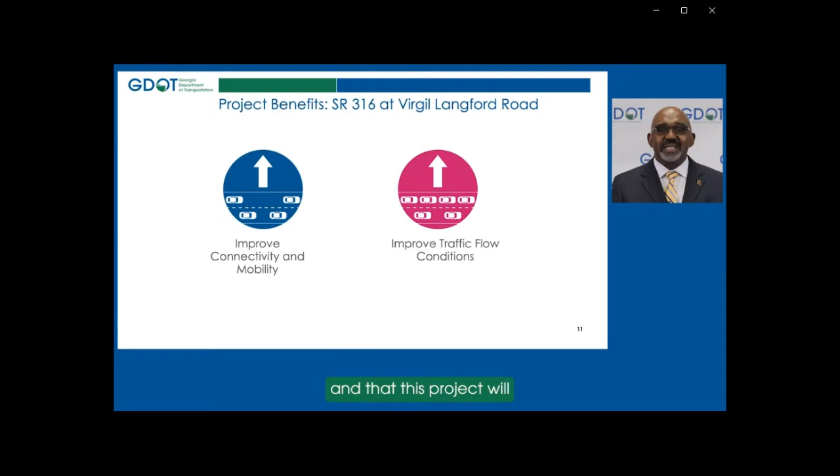Let's take a moment to discuss the benefits of these projects. First, we will look at Virgil Langford Road grade separation. We anticipate moving forward with this project will improve connectivity and mobility for motorists, and that this project will result in improved traffic conditions.

Continuing with the discussion of project benefits, the State Route 316 at the Oconee Connector project will improve mobility, reduce the potential severity and frequency of crashes, improve traffic flow, as previously mentioned. The benefits of both projects are in line with the goals to improve State Route 316 as a key transportation facility for this region.

In 2023, we will select a design build team, and we anticipate construction starting in 2024. We will continue to provide regular updates and communication to stakeholders and the public throughout the duration of the project.

It is important to note that these two projects will be packaged together as a bundle with State Route 316 at Jimmy Daniel Road for procurement, final design, and construction. Project schedule and dates are subject to change.

As discussed earlier in this presentation, we encourage you to visit the project website and explore the informational displays in the interactive virtual meeting room.

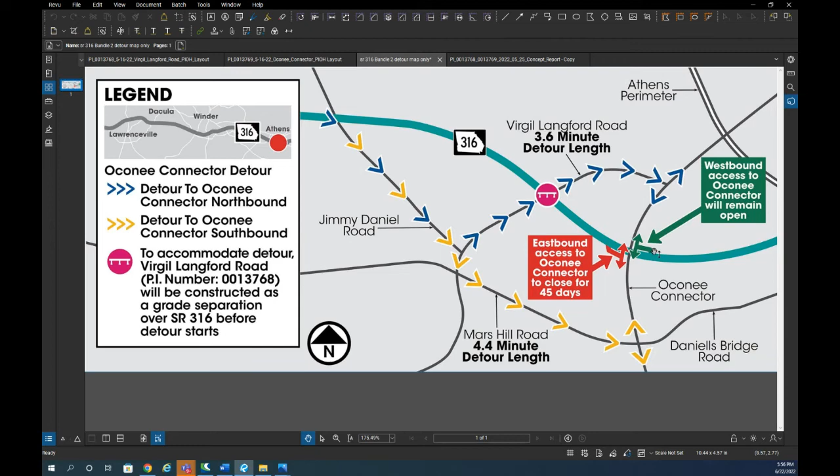Okay, so just for clarification, the flyovers, you'll have a flyover for Oconee and a flyover for Virgil Langford. The flyover for Oconee will be open to north and southbound travel once the detour is implemented, but access from 316 eastbound will not be there. The other ramps for Oconee Connector will be open and access will be available. It's just that eastbound exit ramp to Oconee will not be available during that detour.

So they will access the Oconee Connector coming off of the Jimmy Daniel intersection. And if they're going northbound, they'll have to go Virgil Langford, which means that flyover has to be installed and up and running before we do that. So that Virgil Langford overpass project will essentially be completed at the time the detour is implemented.

And if you're going Oconee Connector southbound via the detour, you'll turn and go to Mars Hill and to the Oconee Connector. So essentially both flyovers, both bridges, will be open at the time of the detour and operational. They just won't have the eastbound 316 to Oconee movement open at that specific location - you'll have to take the detour. I hope this answers the question.

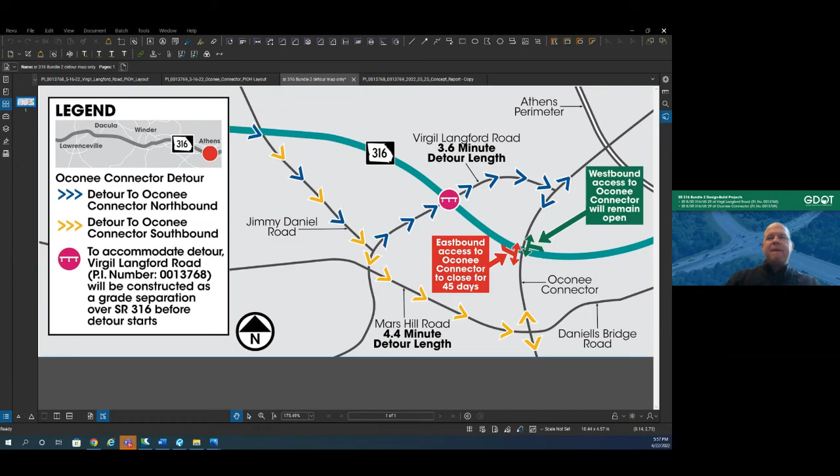Awesome, thank you for that, Chris. And looks like we have about 2 minutes left. I don't see any additional comments in the Q&A box, but definitely shoot those to us before we wrap up this evening. So I'm going to ask the producer team if they could - they already did, read my mind here.